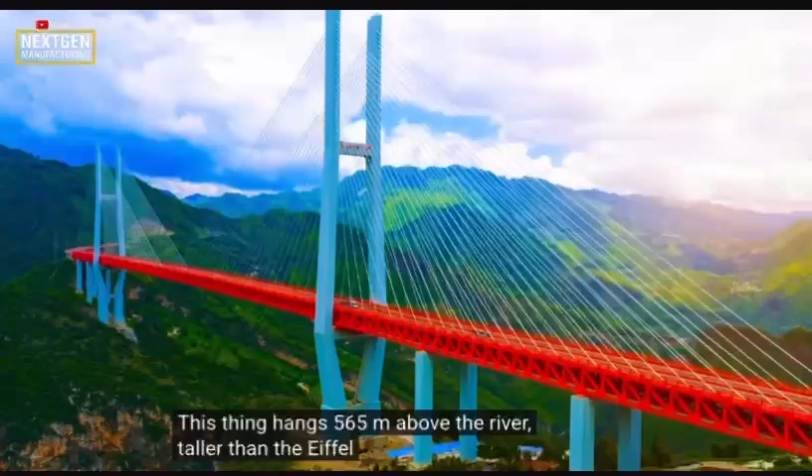What if I told you humans built a bridge higher than the clouds? This thing hangs 565 meters above the river, taller than the Eiffel Tower. You're literally looking at a bridge where planes fly underneath it every day. Driving across feels like floating through clouds with nothing below you at all.

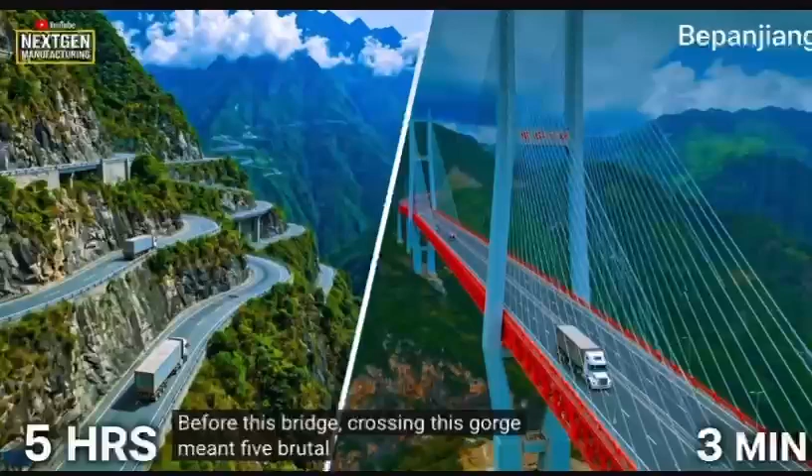Before this bridge, crossing this gorge meant 5 brutal hours of mountain roads. Here's the crazy part. Those cables hold 10,000 tons of steel in mid-air. I'm standing where engineers once said, "Nothing can be built here, ever."

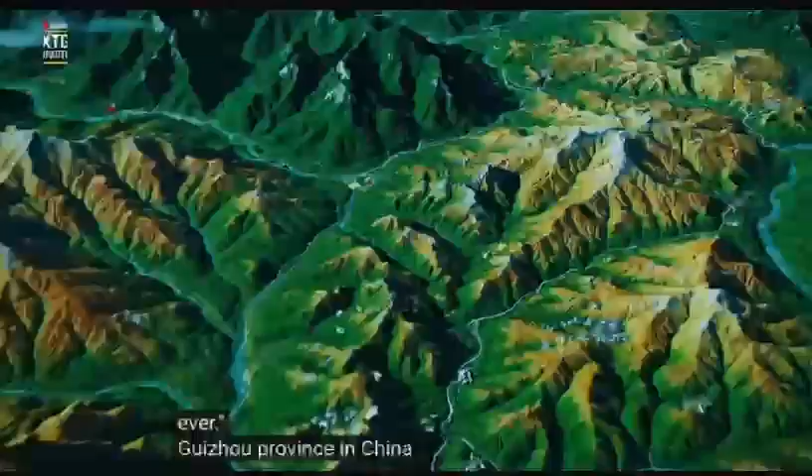Guizhou province in China has always been one of the most isolated places on Earth. Millions of people lived completely cut off. No highways, no fast routes, nothing. Wait until you hear this. Guizhou had no expressway at all until the year 2000.

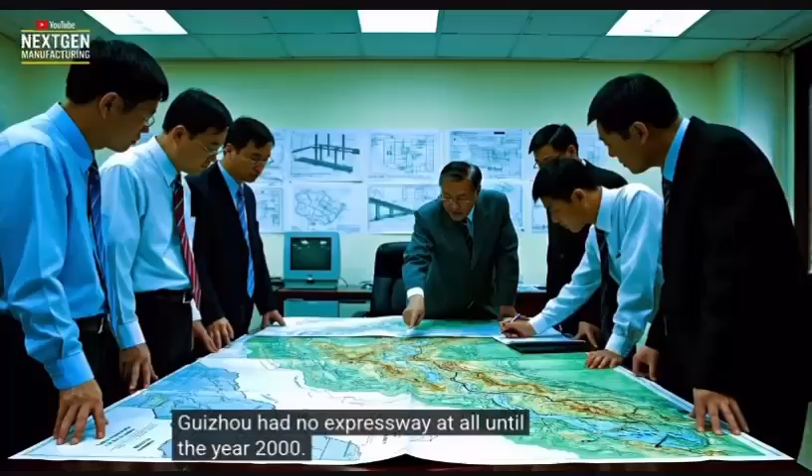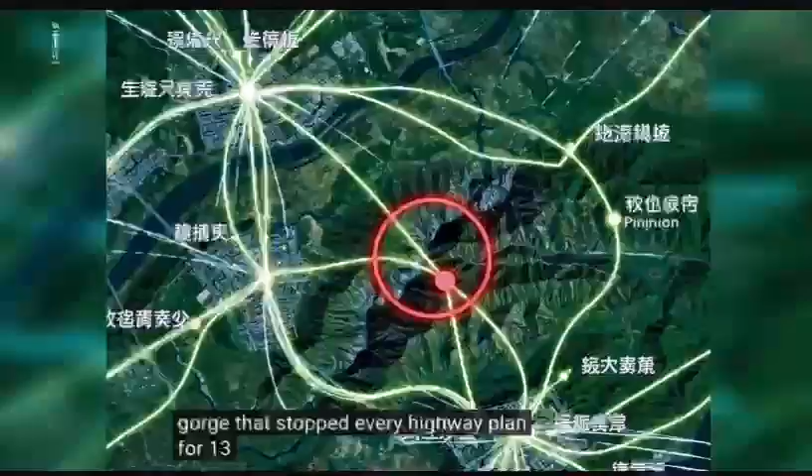China's government made a bold decision: connect Guizhou no matter the cost. The problem was one monster gorge that stopped every highway plan for 13 years. Now you might be thinking, why not just build a regular bridge? Let me show you.

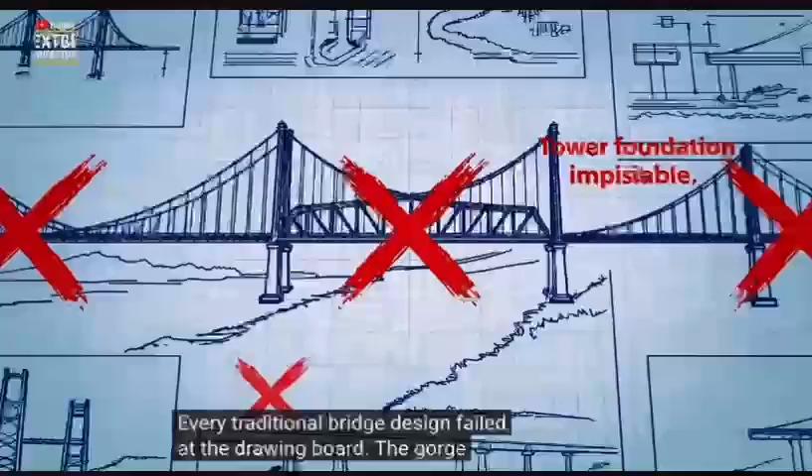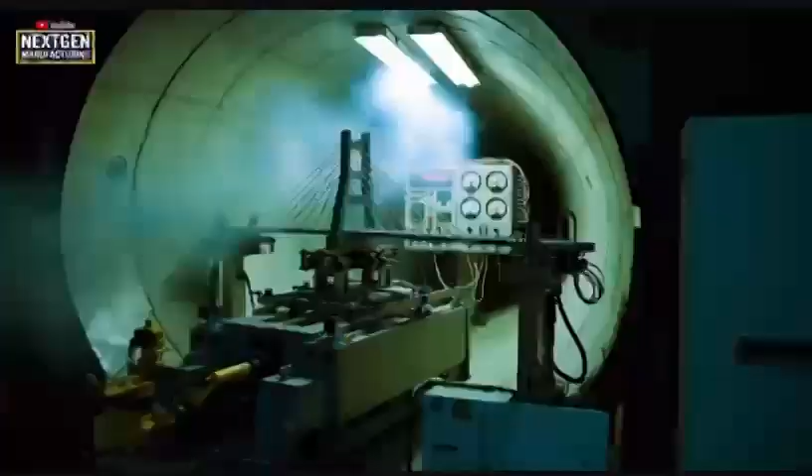Every traditional bridge design failed at the drawing board. The gorge was just too extreme. Engineers spent 2 years just studying this gorge before a single design was approved. The wind data they collected was absolutely terrifying. Gusts reached 140 kilometers per hour.

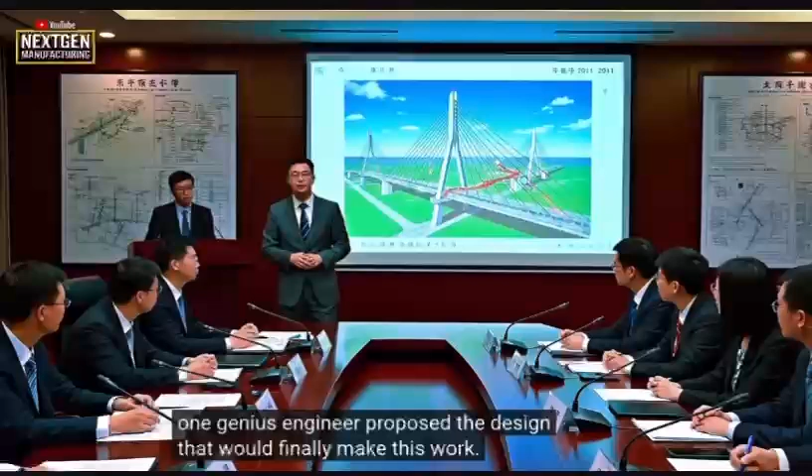In 2011, one genius engineer proposed the design that would finally make this work. This blueprint was the key, a cable-stayed bridge using towers built on cliff ledges. Construction officially began in November 2011, and the challenges started immediately. Some people will ask in the comments, how did workers even get down there to start?

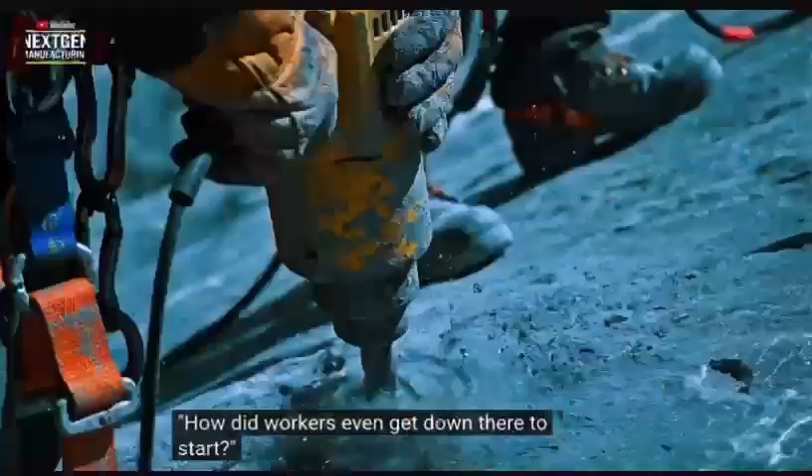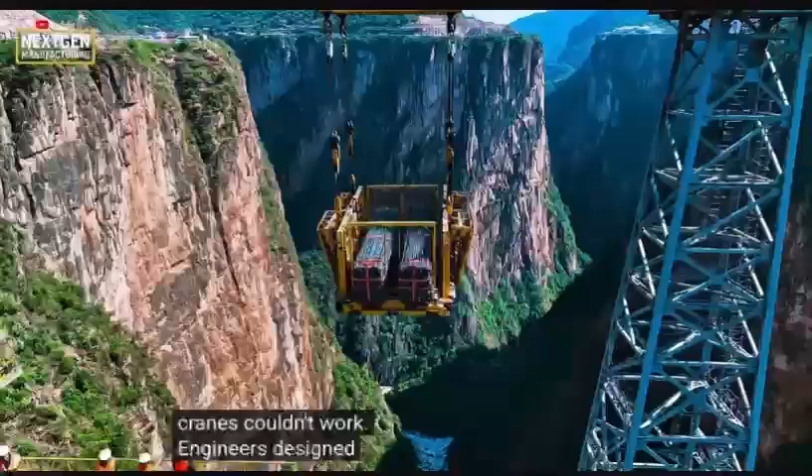Every anchor point had to be drilled by hand into solid rock. No machines could fit. This is where it gets interesting. The site was so extreme that normal cranes couldn't work. Engineers designed a special cross-gorge cable system just to move equipment across the gap. Before anything could be built, a road had to be carved directly into the cliff itself.

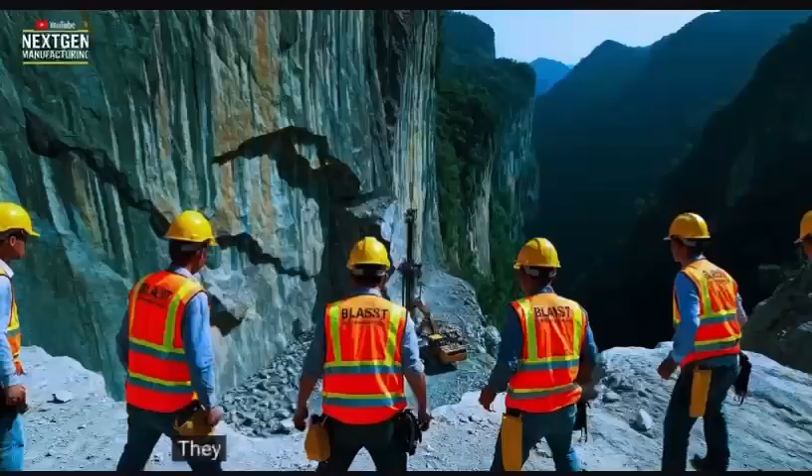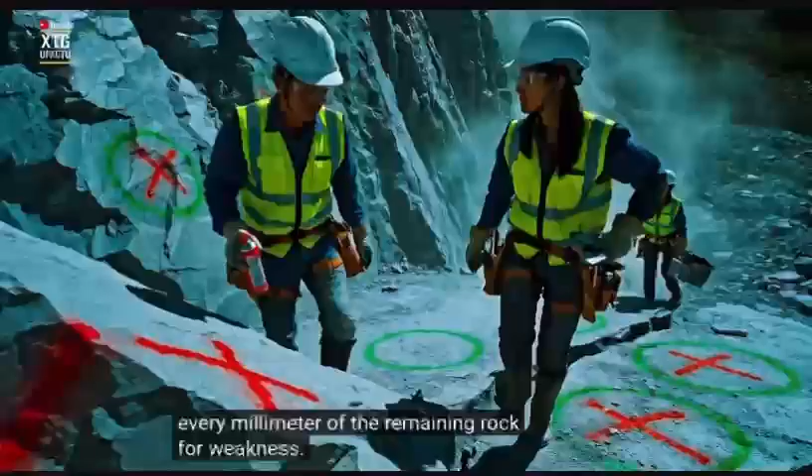They used 200 controlled explosions to clear the cliff face, all perfectly calculated. After every blast, geologists inspected every millimeter of the remaining rock for weakness. Here's the crazy part. 2 separate teams built from both sides of the gorge simultaneously. Each foundation anchor was drilled 15 meters deep into solid bedrock.

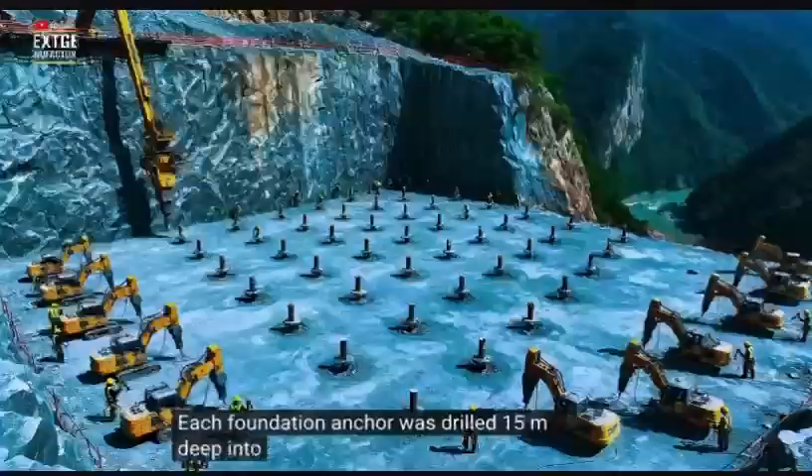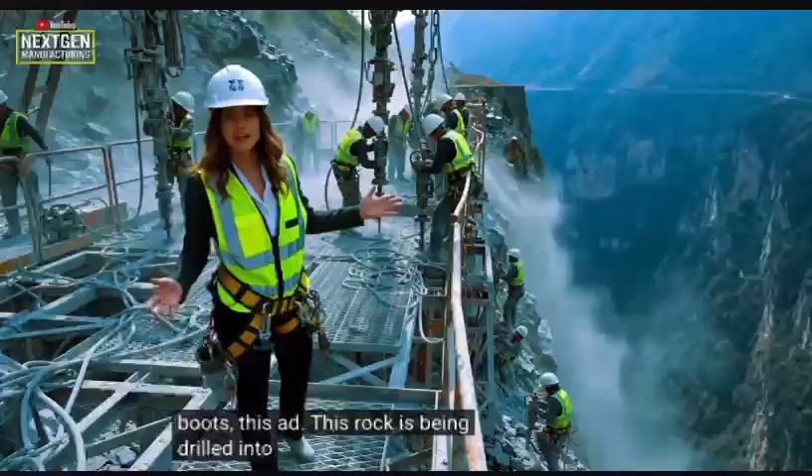No exceptions made. I can feel the vibration through my boots. This rock is being drilled into submission. After 8 brutal months, both foundation pits were finally ready for concrete pours.

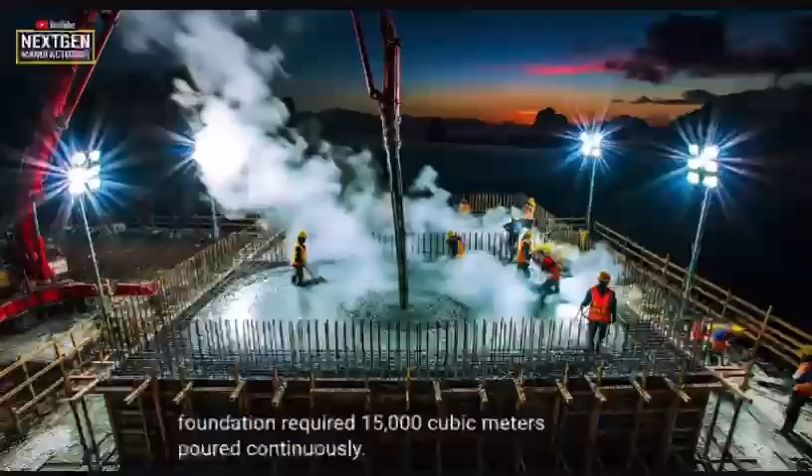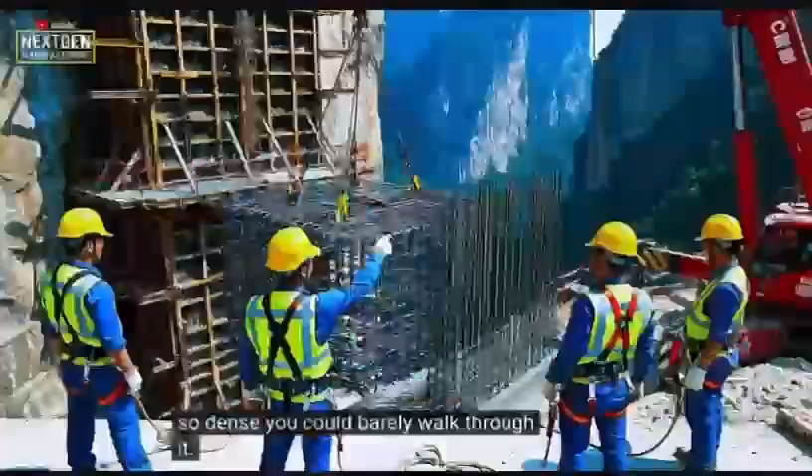The concrete pour for each tower foundation required 15,000 cubic meters poured continuously. They couldn't stop the pour midway. One crack in the foundation and everything fails. Inside that concrete is a steel skeleton so dense you could barely walk through it. Each tower had to grow from the cliff edge, not flat ground. Think about that challenge.

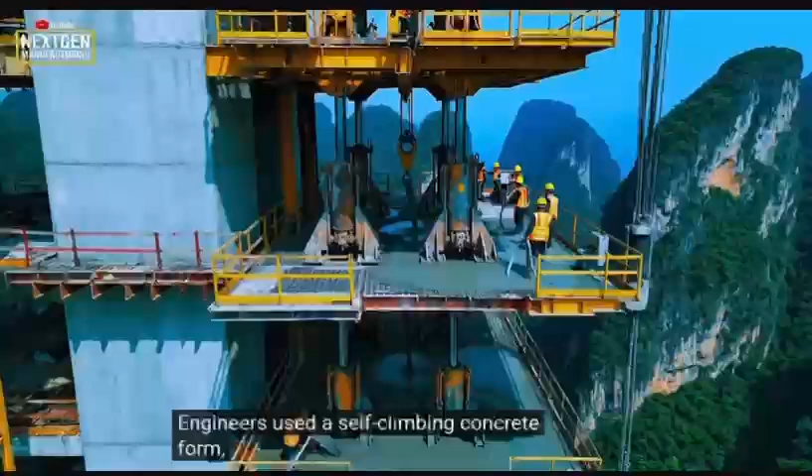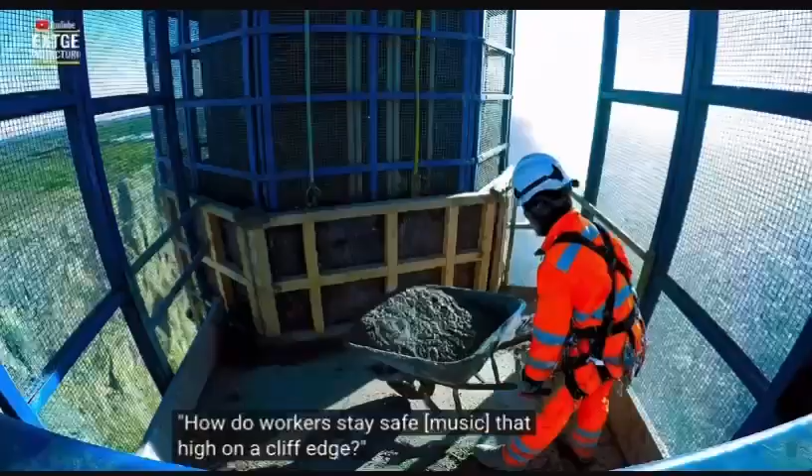Engineers used a self-climbing concrete form, rising 4 meters every single day consistently. Now you might be thinking, how do workers stay safe that high on a cliff edge? Every worker platform was fully enclosed. The wind up there could throw a man off easily. Looking straight up this tower gives you instant vertigo, and it's not even finished yet.

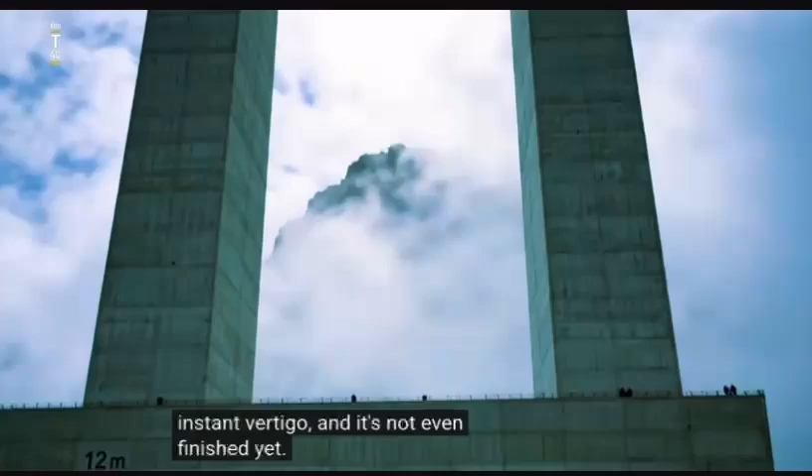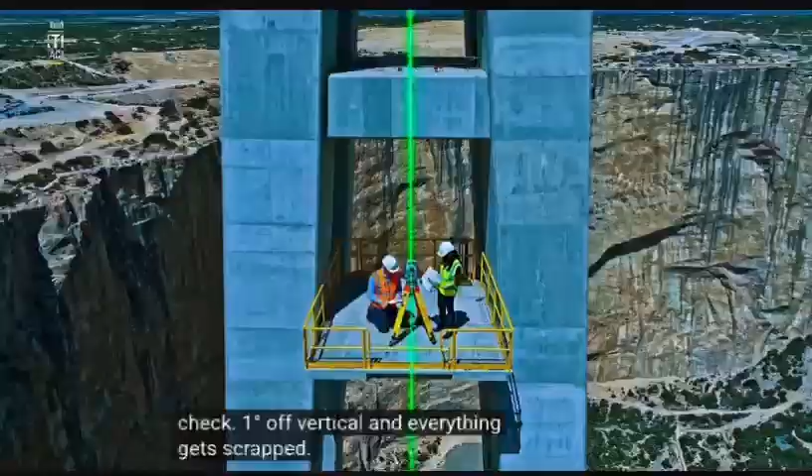Tower 1 reached 100 meters in just 62 days. They were breaking records as they built. Every meter upward required a laser check, 1 degree off vertical, and everything gets scrapped. While Tower 1 grew, the team on the other side was already 40 meters ahead of them.

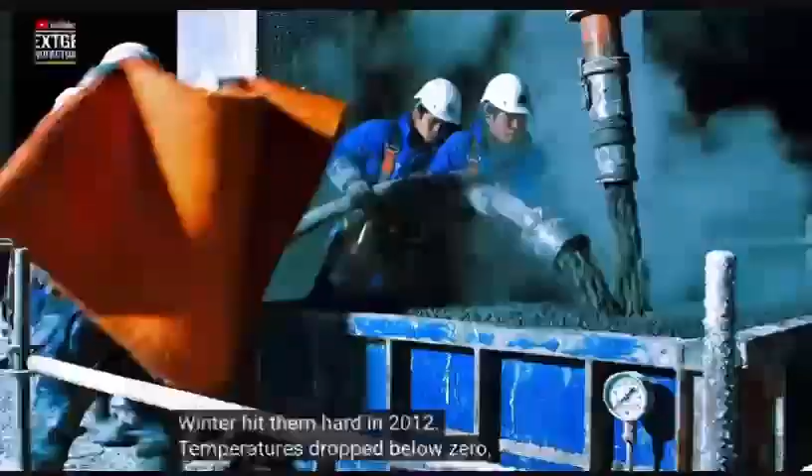Winter hit them hard in 2012. Temperatures dropped below zero, but work never stopped. Inside each tower is a system of pre-stressed cables holding the concrete under compression. Every computer simulation showed the same result. This design could handle anything nature threw at it.

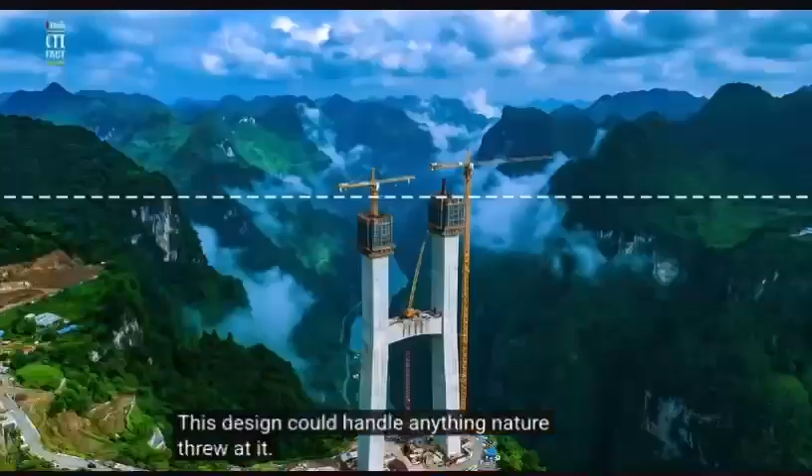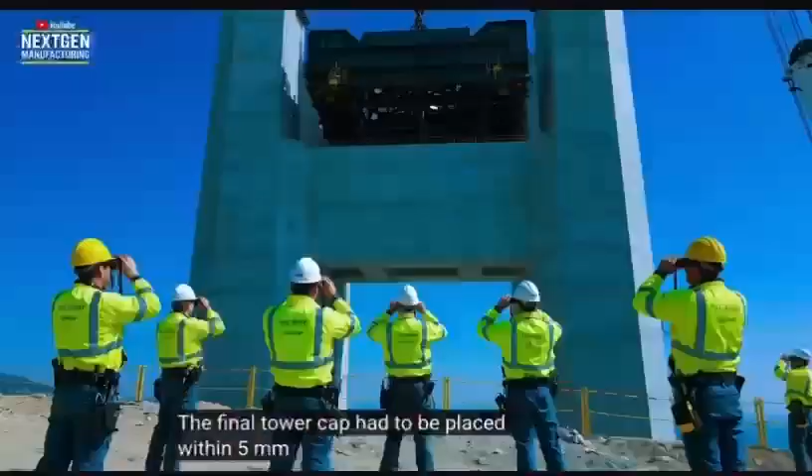This is where it gets interesting. The tower tops were now level with the gorge rim itself. The final tower cap had to be placed within 5 millimeters of the exact target position. Both towers completed in 18 months, 392 meters of concrete rising from cliff edges.

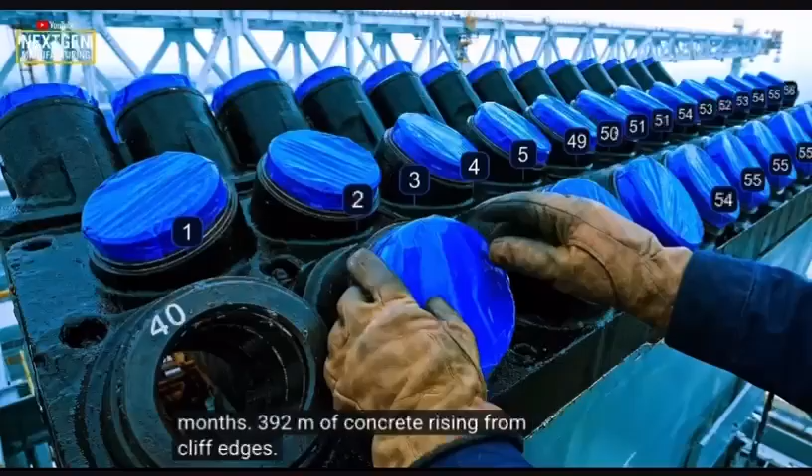Each tower top holds 56 cable anchor points, engineered to handle 4,000 tons of force. Wait until you hear this. After 18 months and 2 complete towers, the gorge was still empty. The cable installation phase was the most technically complex part of the entire project.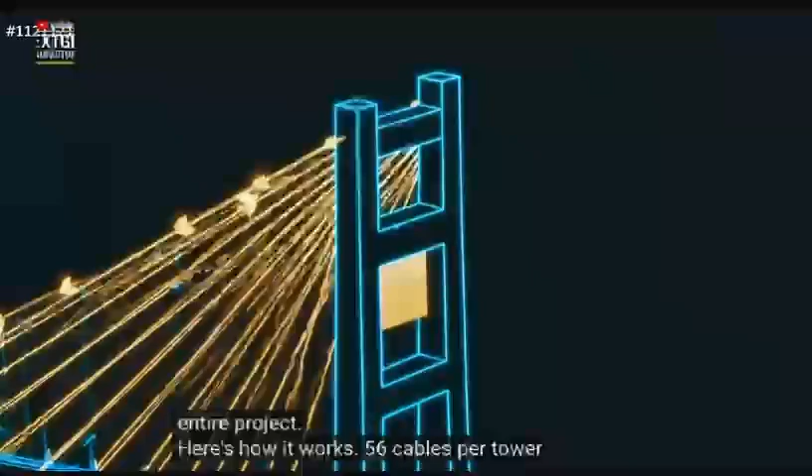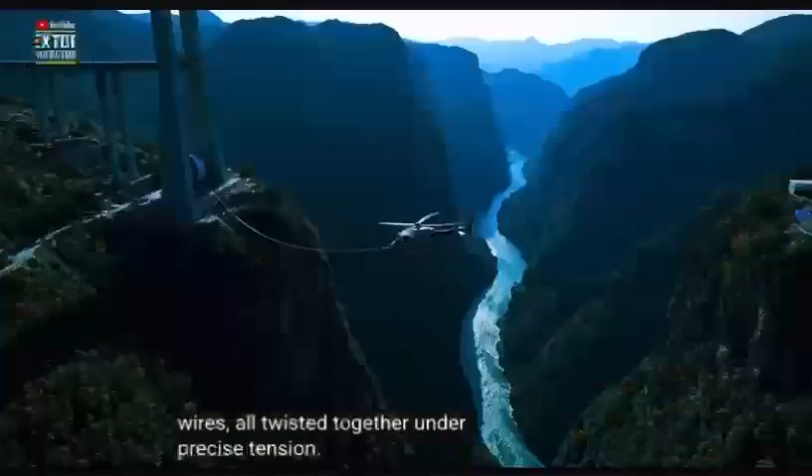Here's how it works. 56 cables per tower carry the deck weight directly to the foundations. Each cable contains 109 individual steel wires, all twisted together under precise tension. They used a helicopter to run the first thin wire across the 720-meter gap between towers.

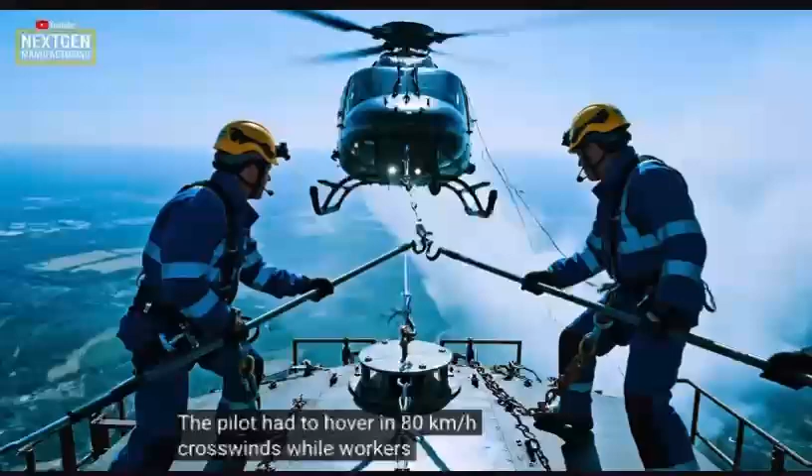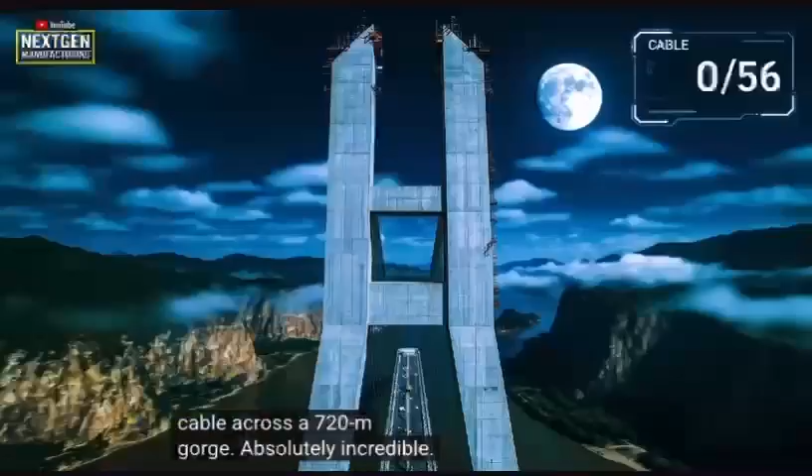The pilot had to hover in 80 kilometers per hour crosswinds while workers attached cables. Insane skill needed. I'm watching a helicopter thread a steel cable across a 720-meter gorge. Absolutely incredible. Every new cable changes the tension on every existing cable. It's like tuning a giant guitar.

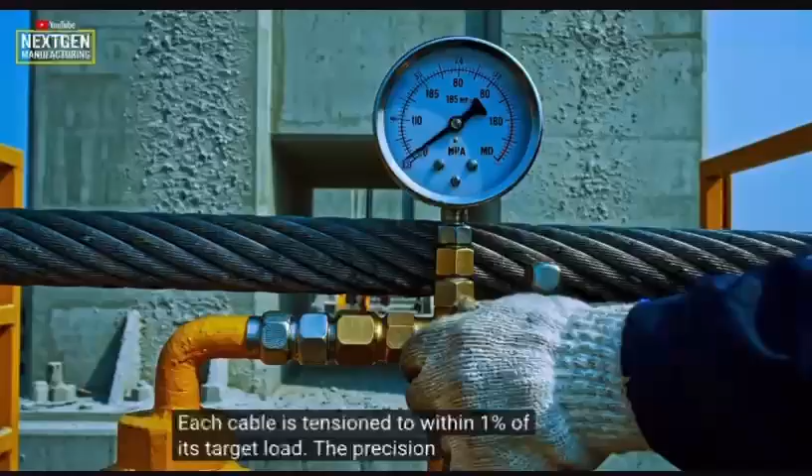Each cable is tensioned to within 1% of its target load. The precision is extraordinary. As cables tighten, they literally pull the deck sections upward into alignment. Watch this. After 28 cables each side, the bridge started looking like the harp of a sky giant.

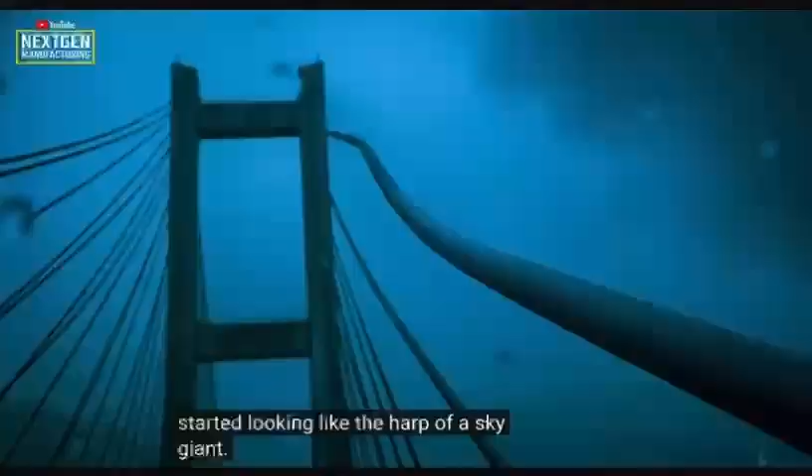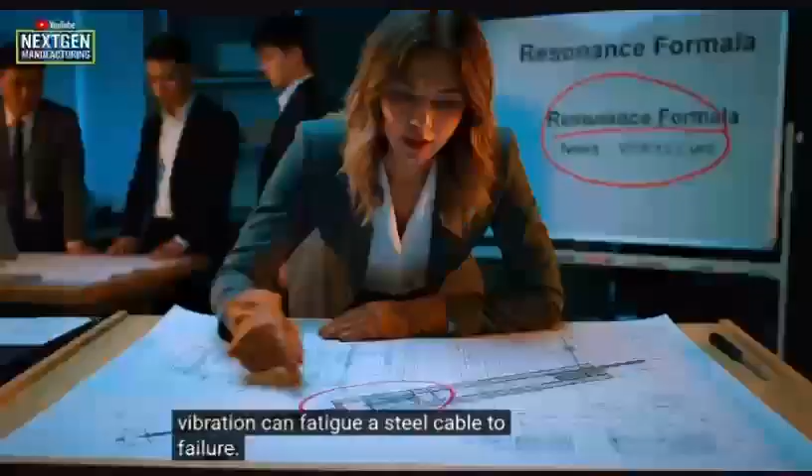Here's the crazy part. The cables started singing in the wind, creating dangerous vibrations. They had to solve this fast. Uncontrolled vibration can fatigue a steel cable to failure. The solution they found that night was elegant.

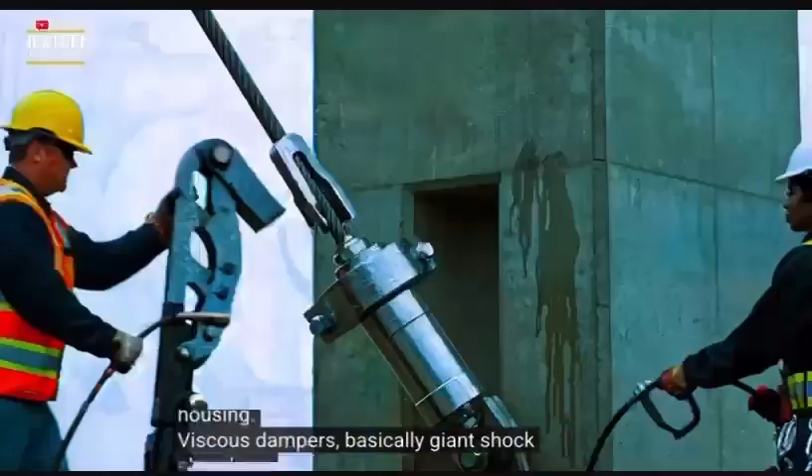Dampers installed inside each cable housing. Viscous dampers, basically giant shock absorbers, were fitted to every single cable installed. Before and after comparison, same wind, same cables. The dampers completely solved the problem.

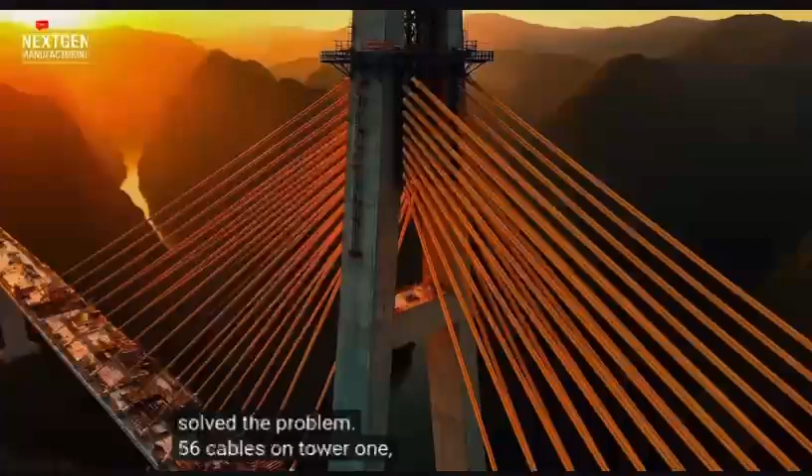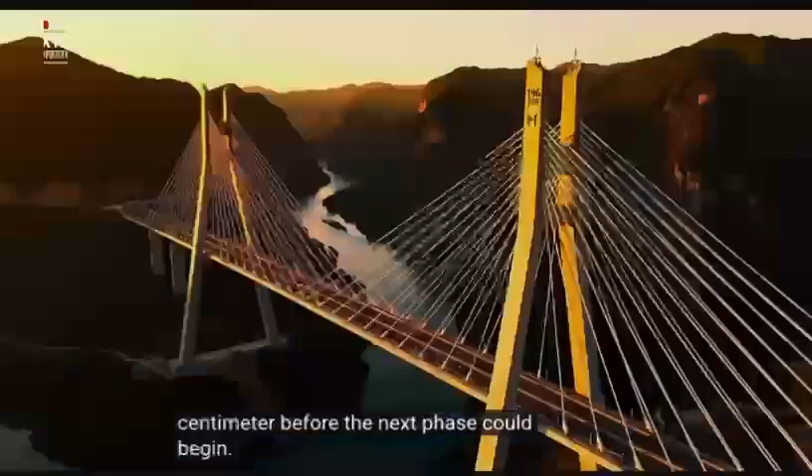56 cables on Tower 1, all tensioned, all dampened, all perfectly aligned. Pure engineering art. Every cable was inspected centimeter by centimeter before the next phase could begin. 112 cables stretching across the Beipan River Gorge, one of engineering's most beautiful sights.

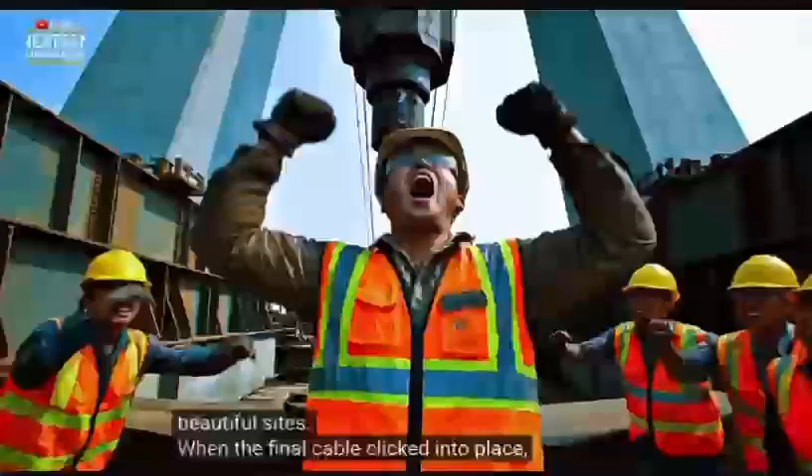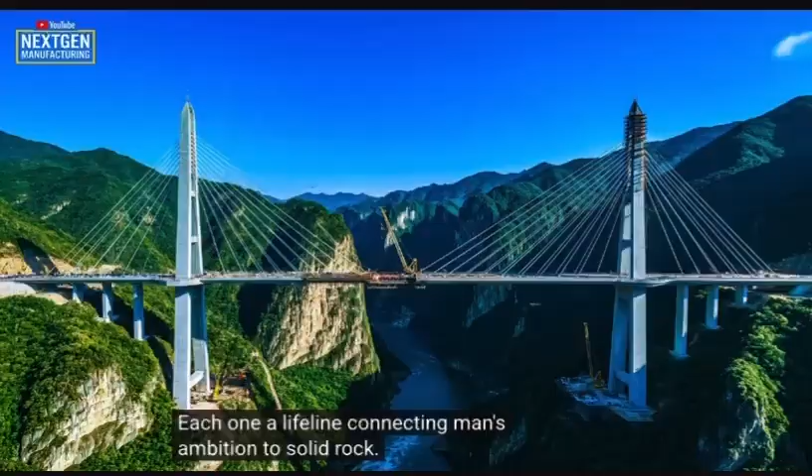When the final cable clicked into place, grown engineers were literally hugging each other and crying. 4 months to install 112 cables, each one a lifeline connecting man's ambition to solid rock. The deck had to be built from both towers outward at the same time, or it would tip over.

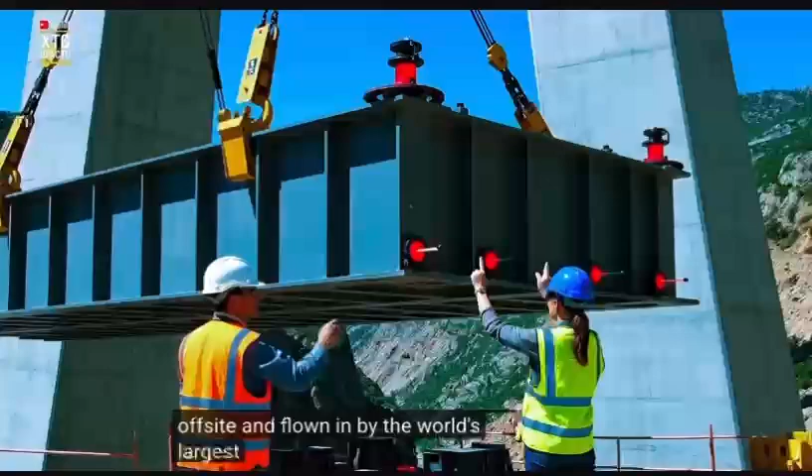I just stepped onto the deck and I can see straight down 565 meters through a gap. Terrifying. Each deck section was prefabricated off-site and flown in by the world's largest cranes. Every single bolt was torqued to a precise specification, then checked twice by inspectors.

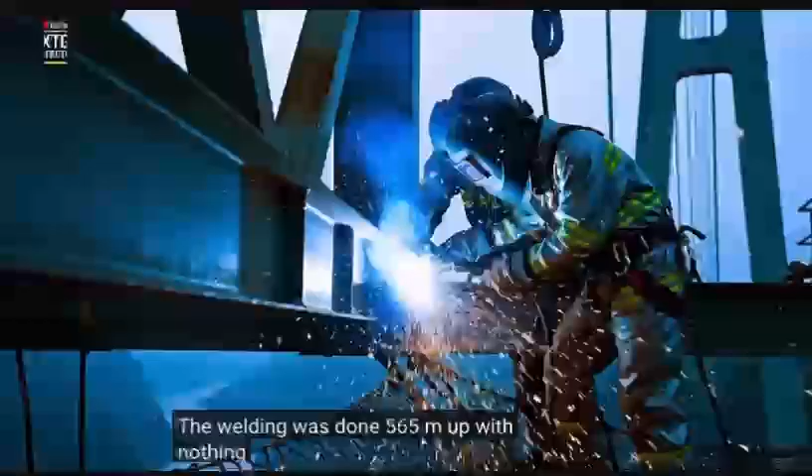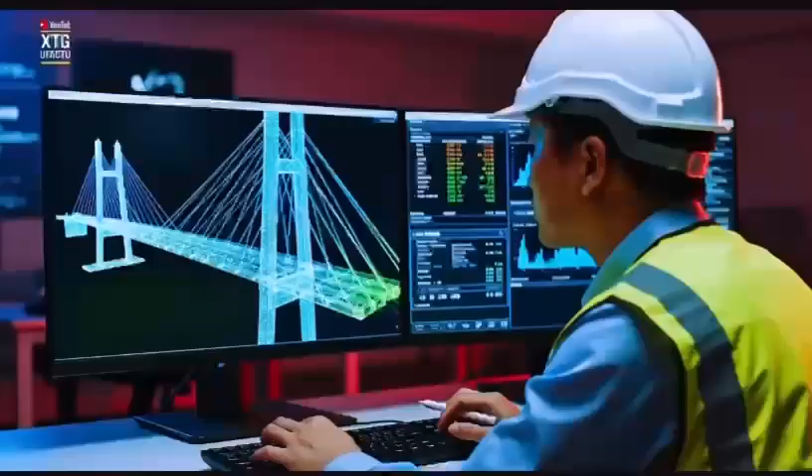The welding was done 565 meters up, with nothing below them but a thin safety net. Now you might be thinking, what happens when those two arms finally meet in the middle? Every meter the deck extended, the stress calculations had to be recalculated from scratch.

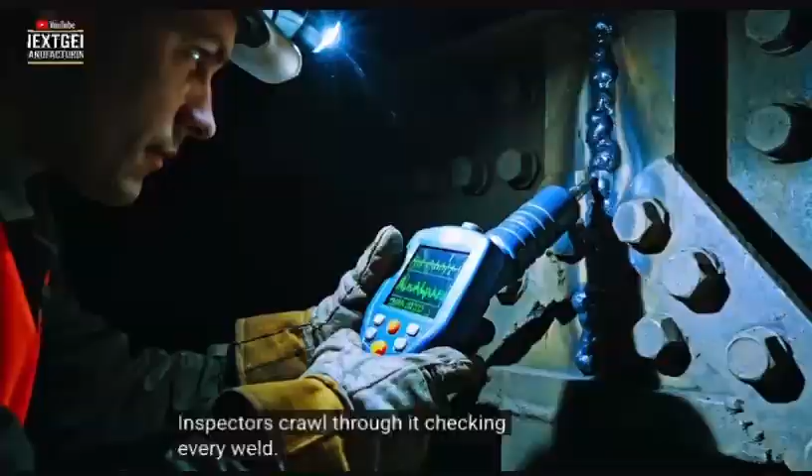Inside the deck is a sealed steel box. Inspectors crawl through it, checking every weld. Some days the wind hit 120 kilometers per hour, but work stopped for nothing. Both deck arms grew simultaneously, and the closing gap became the countdown everyone watched.

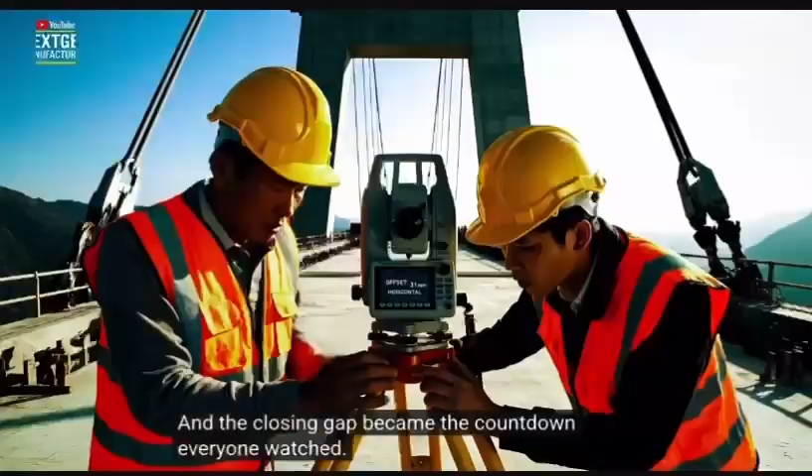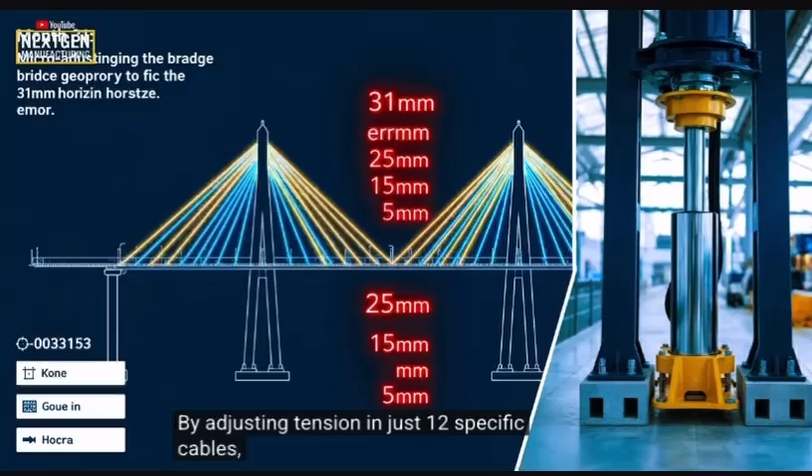Here's the crazy part. When they measured, the two deck ends were 3 centimeters misaligned. By adjusting tension in just 12 specific cables, they moved the entire deck into alignment. After 18 hours of micro-adjustments, the two deck ends were aligned to within 2 millimeters.

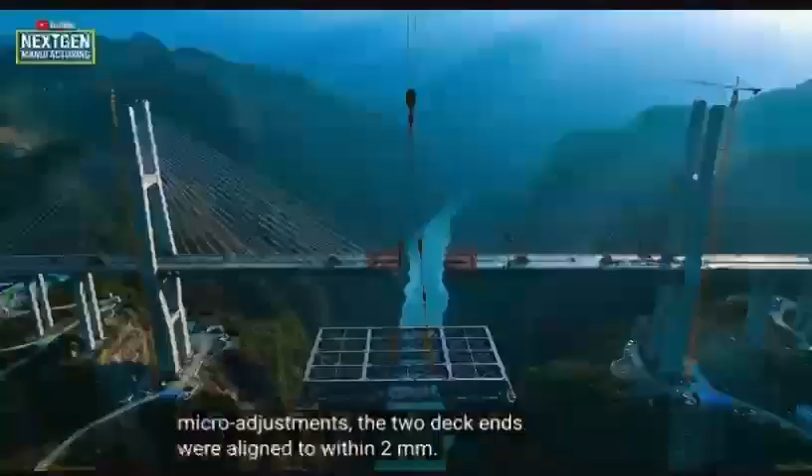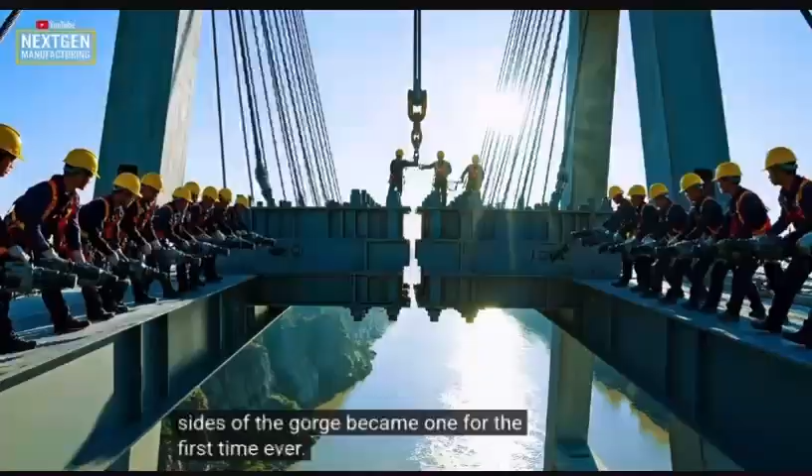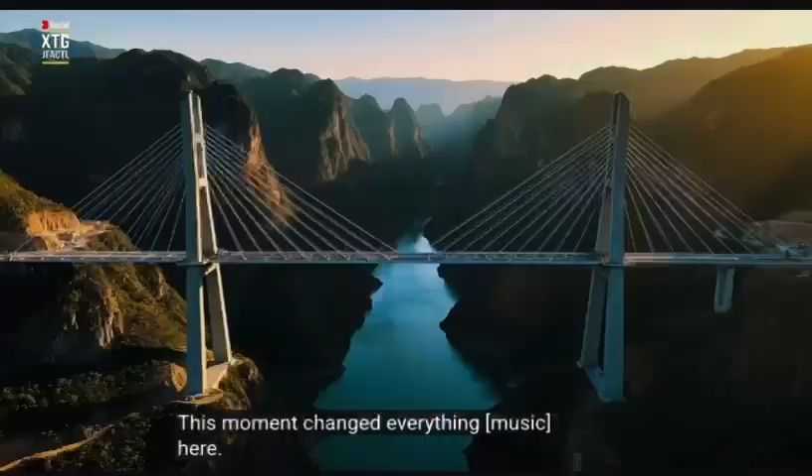Wait until you hear this. The workers started calling it the day the gorge disappeared forever. I'm standing in the exact center where the two halves joined. This moment changed everything here. 1,341 meters of steel deck, completed in 10 months.

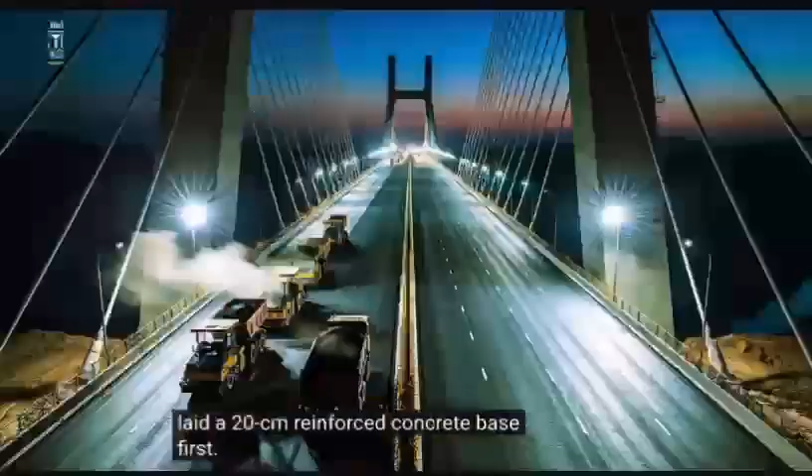The gorge was defeated. Before roads could be built, engineers laid a 20-centimeter reinforced concrete base first. Paving the bridge took 6 days, working 24 hours. They never stopped until it was done. Every safety system was installed simultaneously: crash barriers, lights, lane markings, and signs.

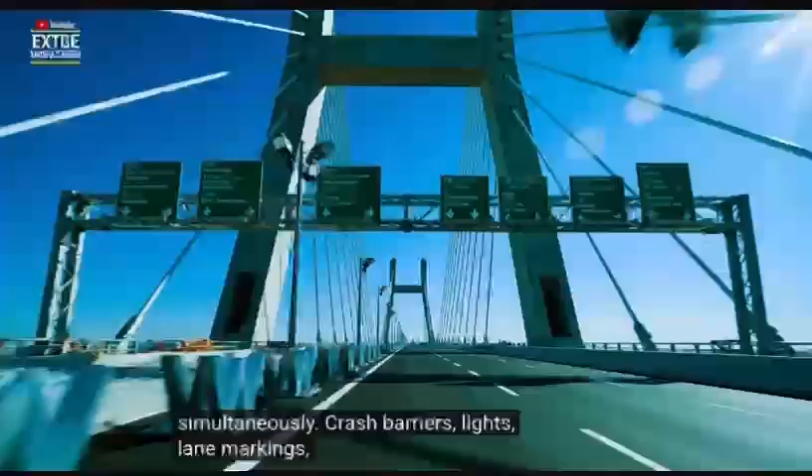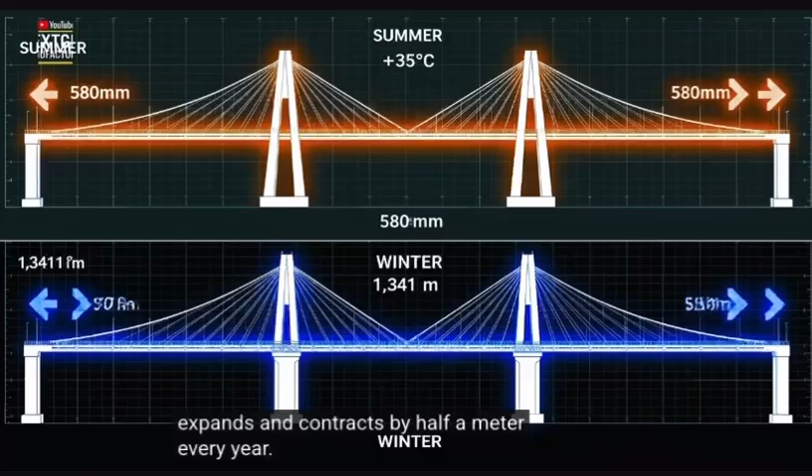Those expansion joints allow the bridge to move 60 centimeters. Bridges breathe with temperature. In Guizhou's climate, the bridge steel expands and contracts by half a meter every year. This bridge has 600 embedded sensors. It reports its own health data in real time, always.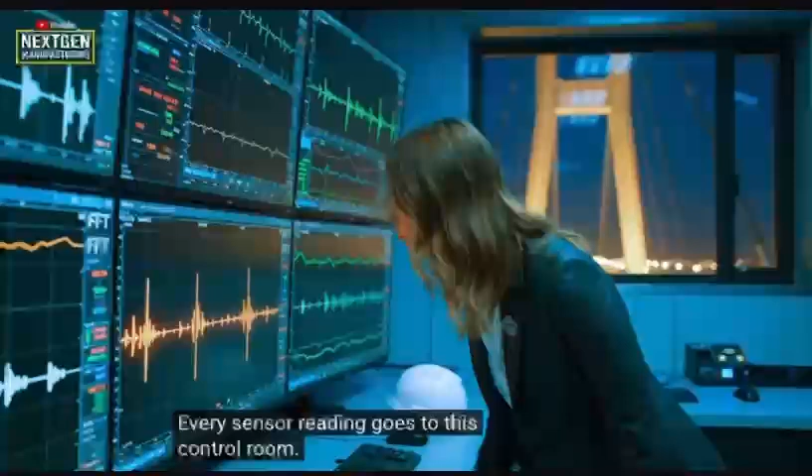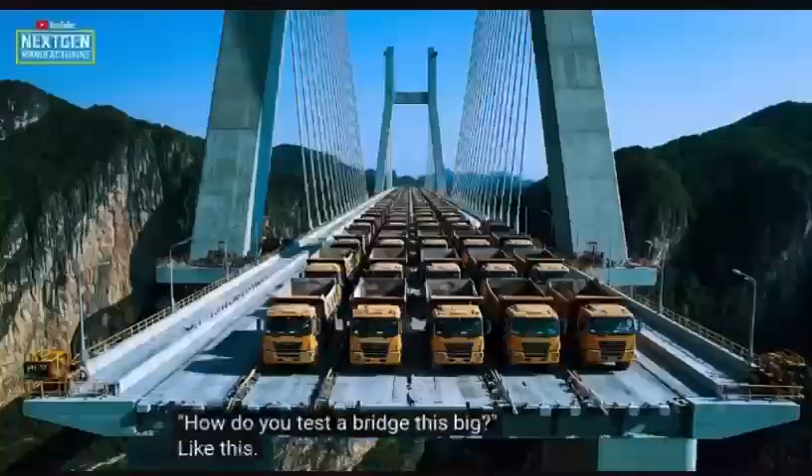Every sensor reading goes to this control room. Engineers monitor this bridge like a patient's heartbeat. Some people will ask in the comments, how do you test a bridge this big? Like this. 80 trucks loaded to maximum weight drove onto the bridge at once.

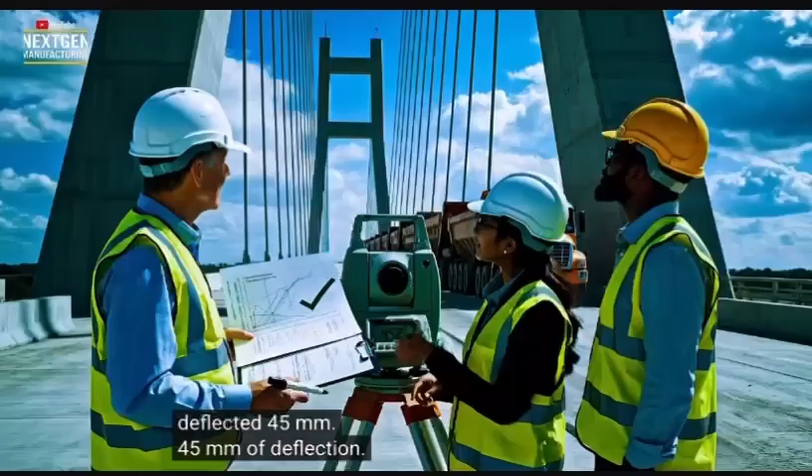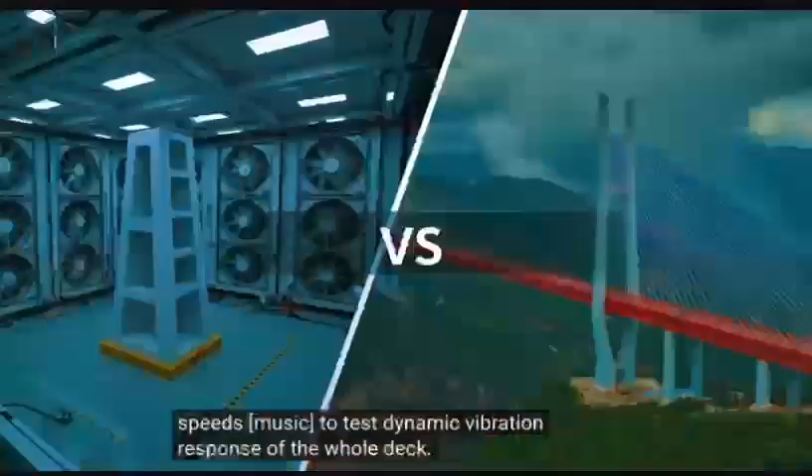The deck deflected 45 millimeters. 45 millimeters of deflection, exactly what the computer predicted. The model was perfect. They then made trucks drive at different speeds to test the dynamic vibration response of the whole deck. The wind data matched predictions exactly. Years of research and testing all validated in one day.

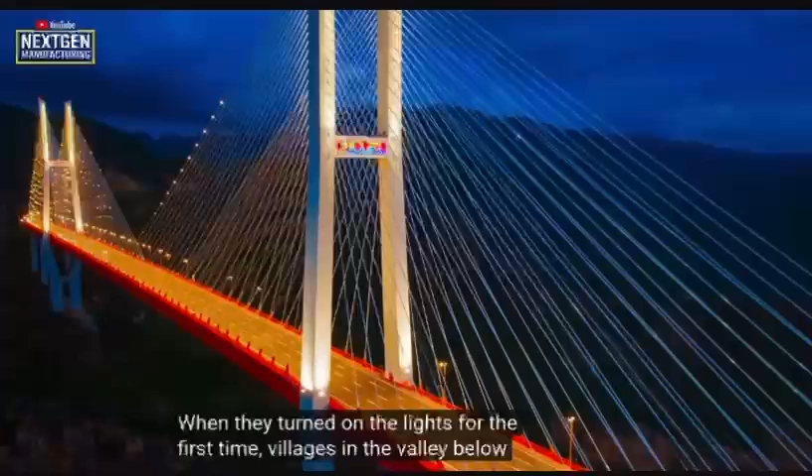When they turned on the lights for the first time, villagers in the valley below stopped and stared. Standing on an illuminated bridge floating in darkness, this is the most surreal moment of my travels. Before opening day, inspectors walked every centimeter of the bridge, checking everything by hand.

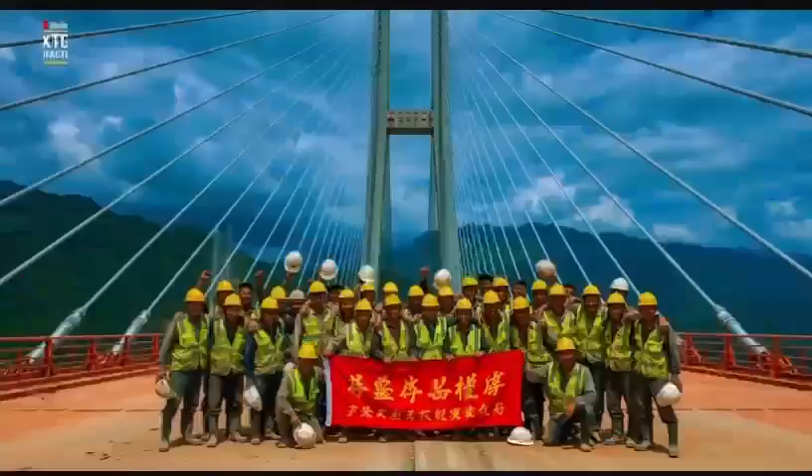The final inspection report was 4,000 pages long, every calculation checked and verified twice. After 5 years of construction, the Beipanjiang Bridge was officially declared ready to open. 3,500 workers built this bridge, and every single one got to walk across it before opening.

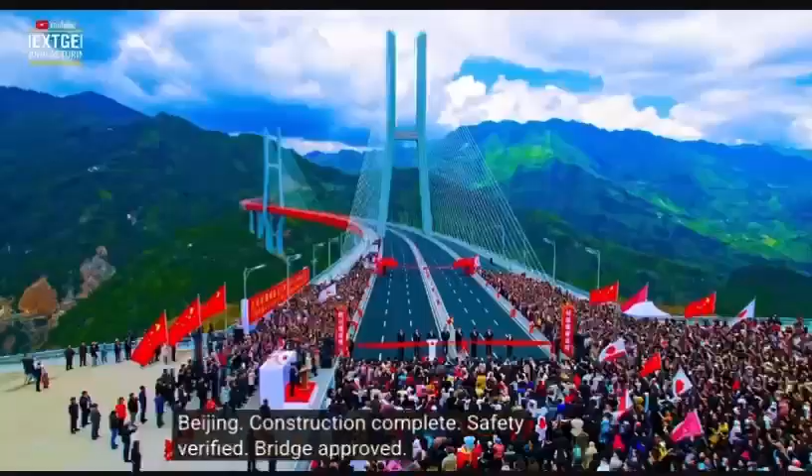The certification came through from Beijing. Construction complete, safety verified, bridge approved. December 29th, 2016, the day that changed Guizhou province forever, had finally arrived. The ribbon was cut at exactly 10 a.m., and the world's highest bridge officially opened.

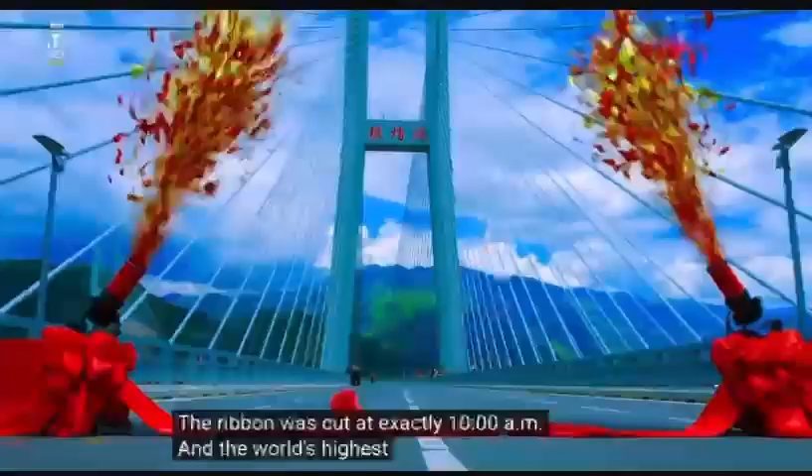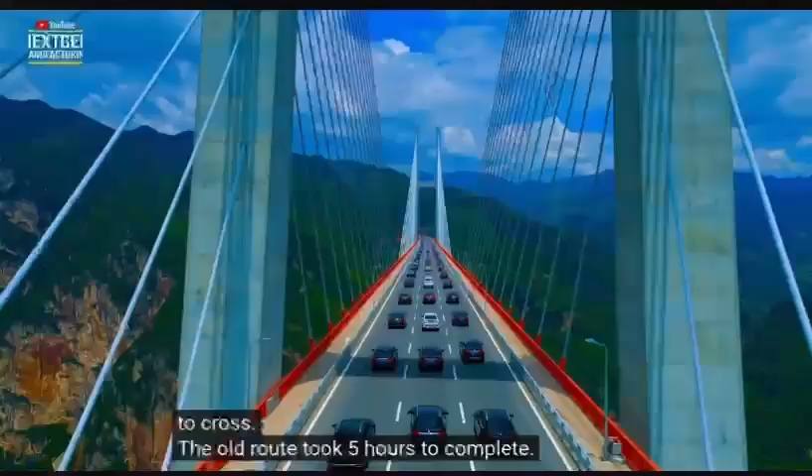The first official convoy took 4 minutes to cross. The old route took 5 hours to complete. Elderly villagers cried. They had walked mountain paths their whole lives, and now this existed. I'm in the first civilian car crossing, and I cannot believe what these humans have accomplished.

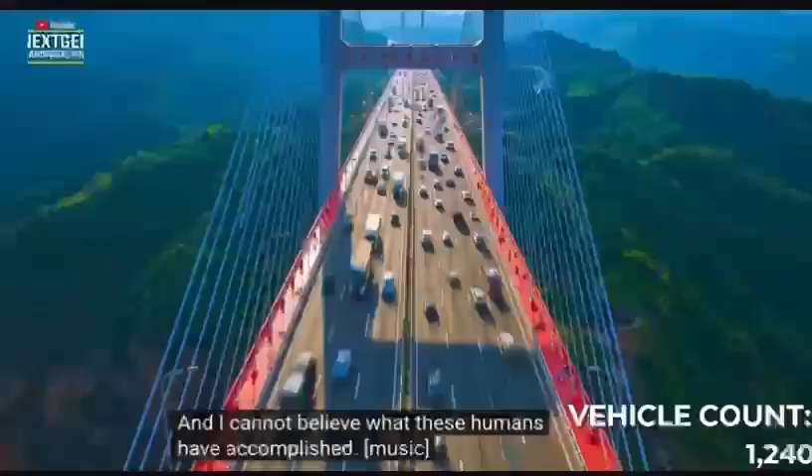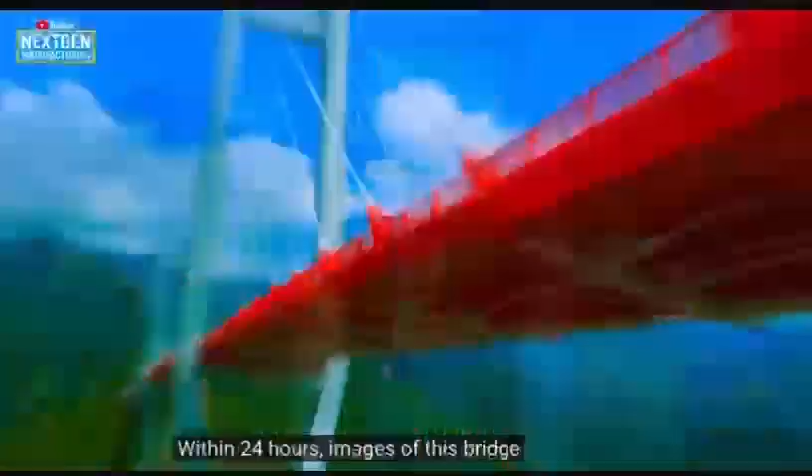On the first day alone, over 3,000 vehicles crossed the world's highest bridge in operation. Within 24 hours, images of this bridge were seen by over 500 million people worldwide online. This bridge cut one business owner's delivery time by 97%. That's not progress, that's transformation.

I've traveled through time to see great bridges, but this one made me genuinely emotional today. Guinness World Records confirmed it officially. World's highest bridge at 565 meters above the river. They said it was impossible, then they built it anyway. That's what humans do at their best.